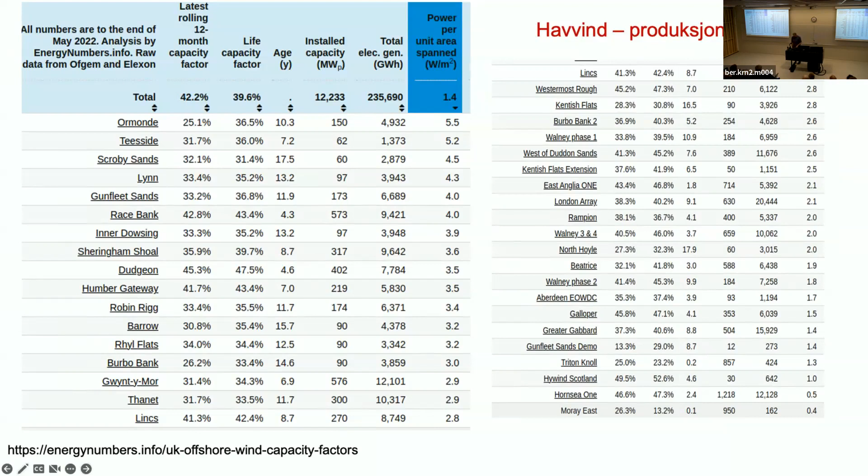4,0 watt per kvadratmeter. Hvis vi ser på solenergi, litt eldre bilde, men de fleste områdene i Europa ligger på 5 watt per kvadratmeter, og så kommer det opp i mer lukrative solenergiområder, da kan vi komme opp i rundt

10 watt. Hvis vi ser på her et eksempel, da, Benban Solar Park i Egypt, den ble åpnet i 2019, og leverer da enn så lenge 11 watt per kvadratmeter. Slik at man kunne fortsatt å snakket om dette, men de tallene står for seg selv.

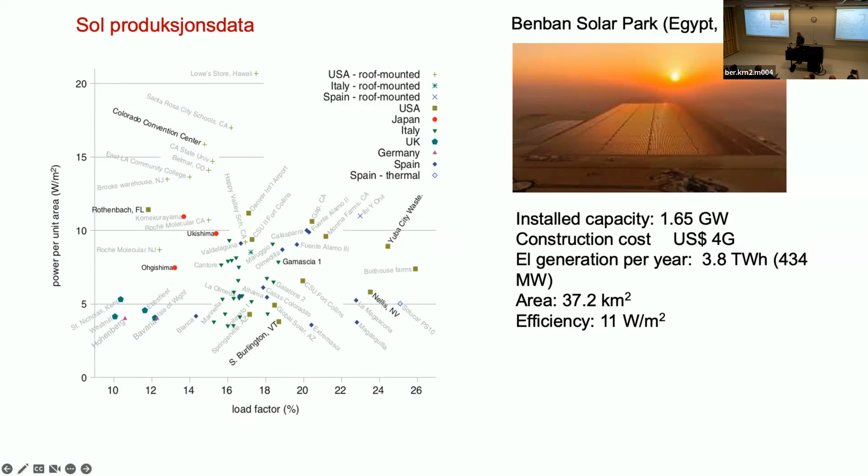Og skal vi da, hvor ender dette? Altså, hvis vi tenker oss et helt sånn hypotetisk globalt energisystem, så trenger vi faktisk ikke å tenke på energilager og dette med intermittency. Fordi i så fall hadde det alltid vært sol noen steder. Det har alltid vært vind noen steder, og egentlig hadde det vært stabil energiforsyning.

Men hvis vi nå tar lærdom av hva som har skjedd i Ukraina, så er det klart at hvis hvert land sørger for sin egen energisikkerhet og energiproduksjon, så slipper man å være avhengig av land som man spesielt nå ikke lenger vil være avhengig av.

Og det krever da energilager til typisk 100, kanskje mer dager, som vi må ha i tillegg når sol og vind ikke blåser.

Og så har vi også det at hvis vi skal lage hydrogen, ammoniakk eller andre flytende drivstoff, så trenger vi mer energi enn bare til primærbehovet. Så la oss nå si vi går ned til 2 watt per kvadratmeter som tar hensyn til lagerbehovet, og da trenger vi 2000 kvadratmeter hver og en av oss for å

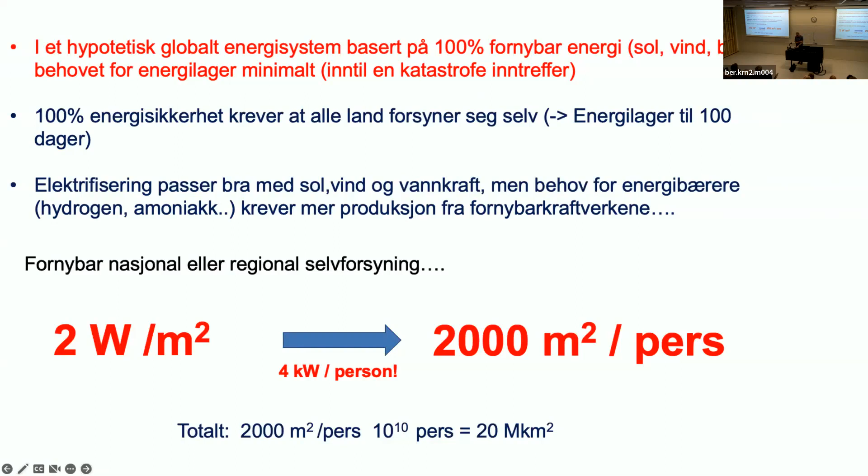forsyne nok energi. Og det gir da 20 millioner kvadratkilometer av jordens overflate som må brukes til energiproduksjon. Og er det noe problem? Vel, da får vi se på jordens overflate. Det drøye 100 millioner kvadratkilometer er beboelig, minus isbreer og litt andre ting, sånn at i forhold til 100 er kanskje ikke 20 så mye.

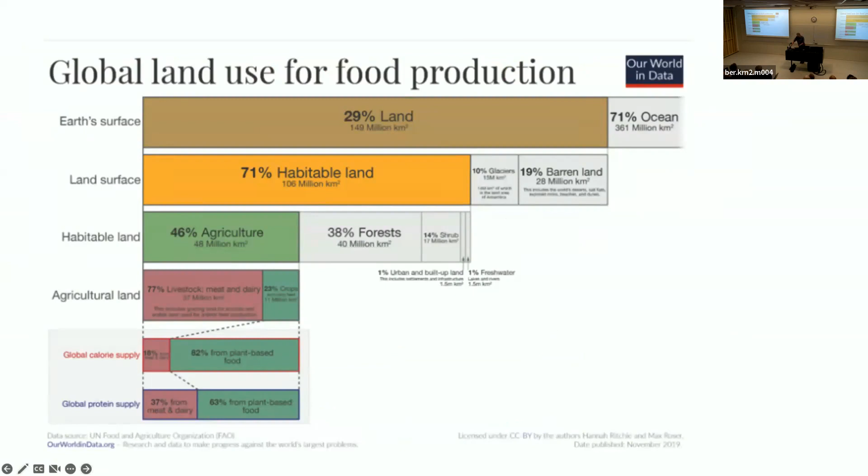Vår klimaminister har allerede fredet 30% av det. Der skal dyrene få gå i fred i skogen, og det skal være urørt. Dermed ble jordens overflate tilgjengelig for menneskelig aktivitet 30% mindre. Og på dette skal vi da legge inn 20 millioner kvadratkilometer til energiproduksjon. Da ser vi at det ikke blir så mye igjen til jordbruk, hvis energiproduksjon utelukkende fortrenger jordbruket. Det trenger det selvfølgelig ikke være, men vi ser at dette er en stor del av det som er tilgjengelig.

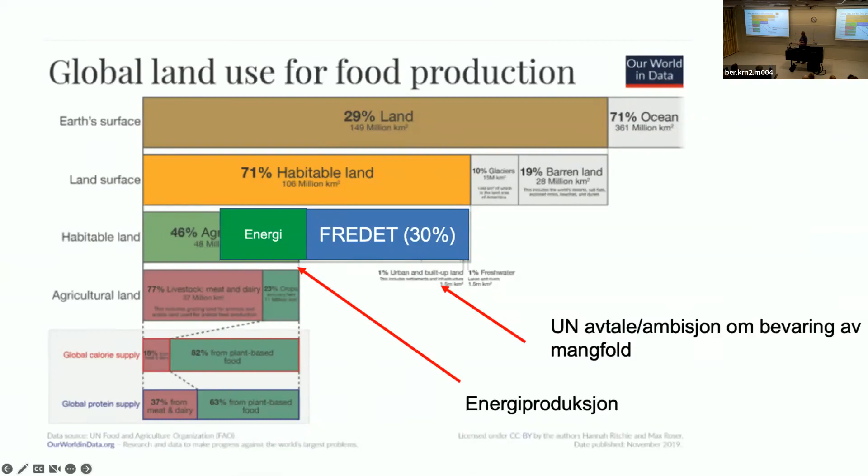Men det var hele jorden. Hvis vi nå ser på at kanskje skulle det være sånn at regioner og store land må være selvforsynt med energi, så hvis vi bruker folketettheten og deler den på 4 kilowatt, får vi prosent av landet eller regionen som må brukes til energiproduksjon.

Og vi ser at i Europa er folketettheten ca. drøyt 30 personer per kvadratkilometer, og det betyr at 13% av overflaten til Europa må brukes i dag. Selvfølgelig kan vi ta litt havflate også, men størrelsesorden der. Hvis vi tar vekk 30%, går det opp i 19%.

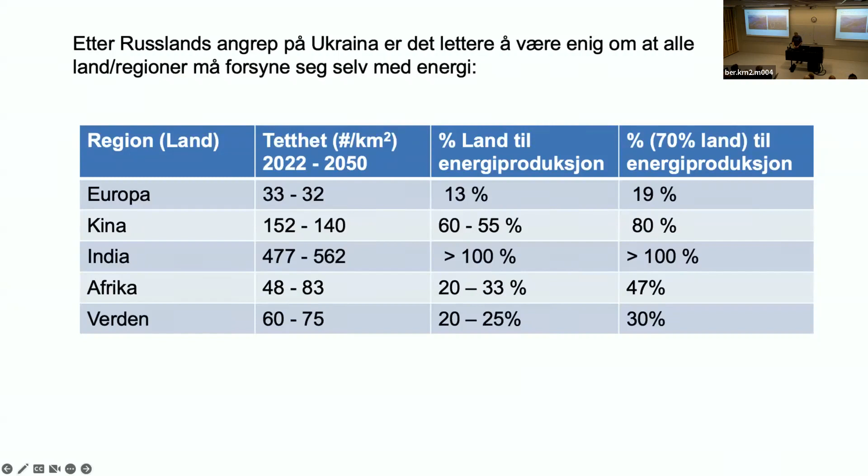Og fremdeles ser vi da at for eksempel i India skrives det rapporter og papir om hvordan 100% av India kan forsynes med fornybar energi med vind og sol og jippi, og så kommer man gjennom. Og det er på en måte et stort dilemma, tenker jeg.

Her er en Fraunhofer-rapport som hevder at det er mer enn nok land i Tyskland, fordi jordbruksarealet kan brukes dobbelt. Men det må jo være sånn at hvis du har solceller på jordbruksareal, vil solcellene absorbere mesteparten av sollyset. Og det vil i hvert fall redusere effekten på jordbruket kolossalt. Pluss at du må lage veldig små eller andre traktorer og sånne ting. Sånn at dette stemmer liksom ikke. Når jeg ser på sånne ting, reagerer jeg på det som fysiker.

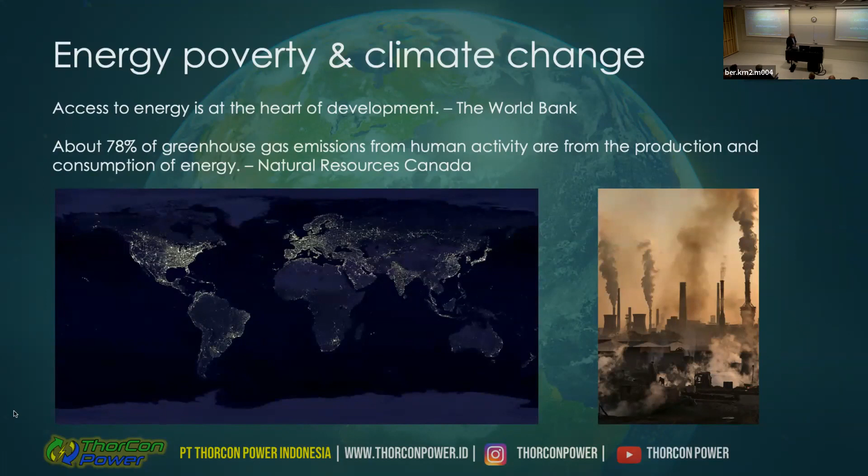I got a job with my client who ran large tankers in the Bahamas, and those tanker owners are the basis of ThorCon. We realized that we have an energy problem in the world. We have too many people living below poverty level, and all of them want to rise above and have a decent life. We were shipping oil, so we weren't helping - we were taking crude oil from the Middle East to the US, China, Japan, etc. But our founder, Jack Devanney, a professor from MIT, sat down and realized we need something else, and he quickly concluded that nuclear is the solution.

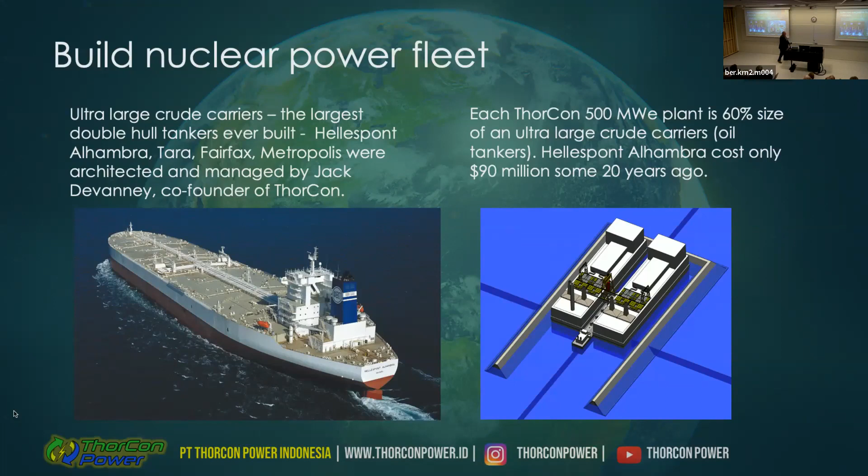Building in shipyards means we can do quick construction and have economy of scale. When you build in a shipyard, there are usually 4 or 5 ships being built at the same time at different stages, and you just follow the rolling lane, like when you build Boeing airplanes. It's the most economical way of building.

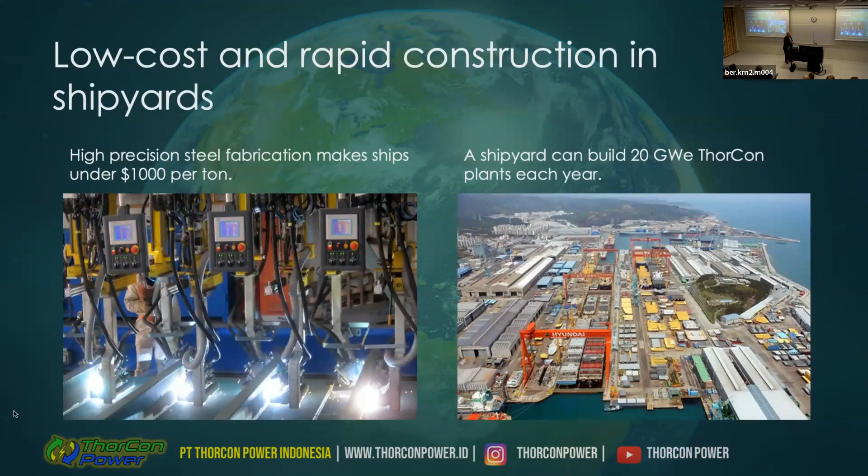A picture of the DSME shipyard in South Korea. Once our plant is built, we will tow it - either a wet tow, meaning it's floating, or on a heavy lift - down to site. And there's a picture of the island, Kelasa Island, which is the island site given to us by the Indonesian government.

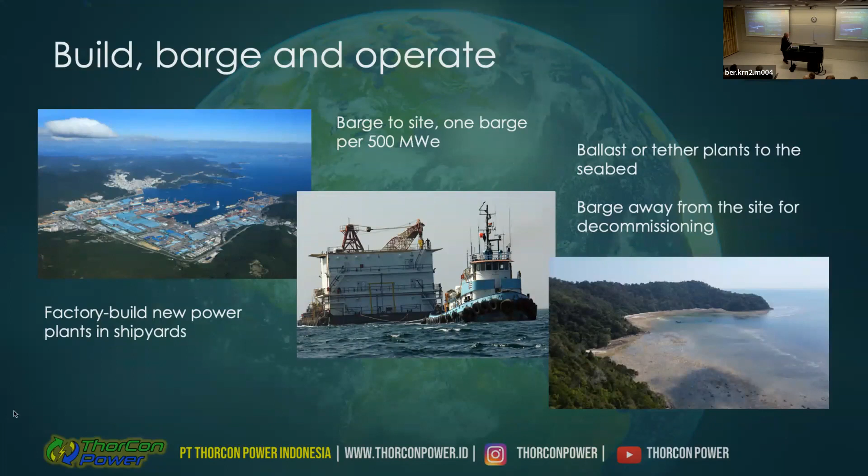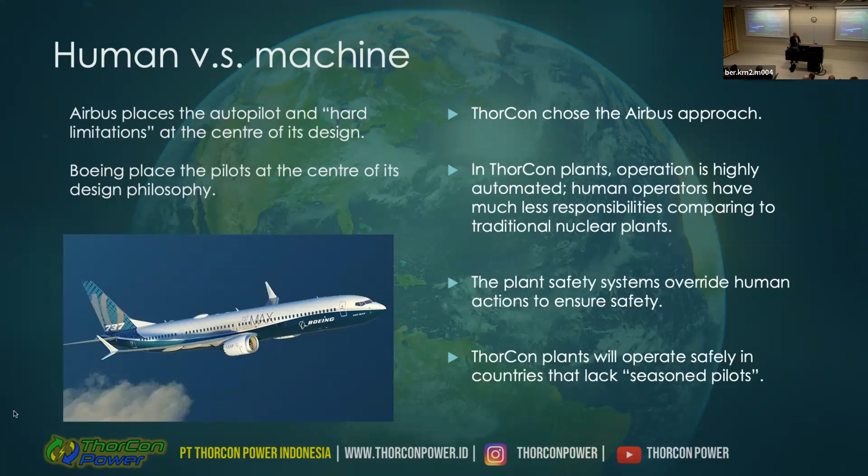A lot of people that we meet are very much afraid of nuclear. What happens if something goes wrong? The aircraft industry has two dominant players, Airbus and Boeing. Boeing has, for years, based their business model on human training and having humans controlling the airplanes, whereas Airbus has the total opposite approach, whereby the technology runs the plane. With ThorCon, we have adopted the Airbus approach. We do not let humans run our nuclear plants. They'll be run by the technology that we have developed. So what's our plan?

We are going to build a test plant, a non-fission test plant, somewhere in Indonesia, which we estimate will be finished sometime in 2024. Then we will test it, and based on those tests, we will start construction of our commercial reactor, which we expect to be on site in 2028, tested and started producing electricity in 2029. And then you can see how we are able to scale up in only a matter of years. We can have 18.5 gigawatts online with our technology.

When we started talking to people, they would say, oh, nuclear is too expensive, there's no way we can afford nuclear. So we quickly realized that we have to be cheaper than coal, otherwise we cannot get countries in the third world to listen to us. Our production cost, our cost for electricity, is 3.5 cents per kilowatt hour, all in: building, operating, decommissioning.

In this example, we're showing what the price of coal, the electricity from coal, is in Indonesia. It's 6.5 cents. So we found that the Indonesians could be willing to give us a power purchase agreement at the same price as coal, which means that one plant would generate 3 cents per kilowatt profit, which is $236 million per year per plant. So not only are we giving clean electricity to the third world, we're also offering very lucrative

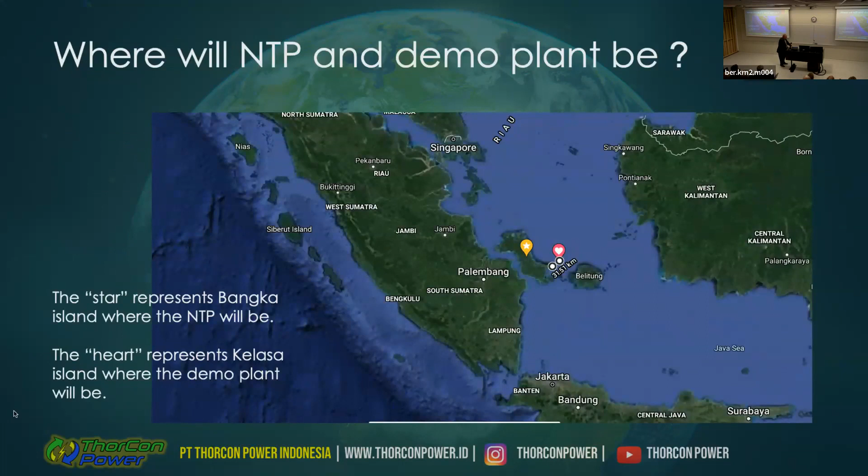We have been given a demonstration site, which is on an island called Kelasa Island. If you look, you probably recognize where you are if you see the picture. It's halfway between Jakarta and Singapore, and not very inhabited. There's a small island called Kelasa Island outside of Bangka Belitung, which you see on the right, and the big cove to the north on the island. That's the site that we have been given.

And that's our vision of how the site will look once it's fully operational, with some accommodation units. Not sure why we put in a tennis court, which is too hot to play tennis, but we did. That's the problem with designers—they put in something that you really don't need.

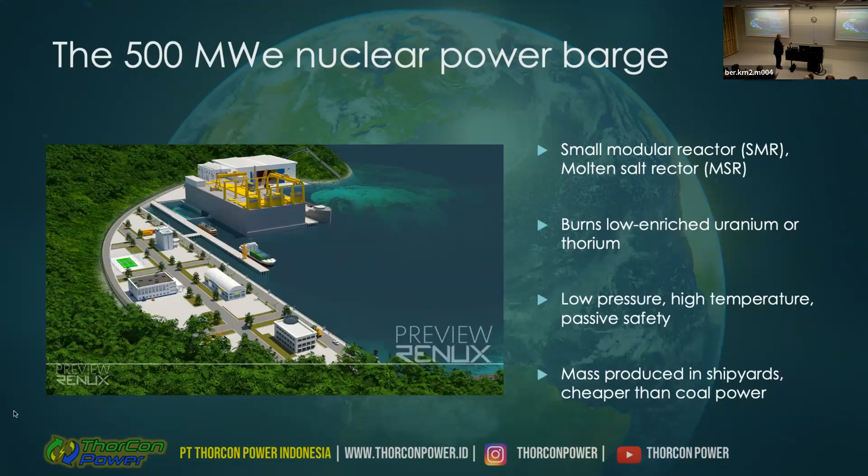So we've developed a small modular molten salt reactor technology where we can provide the world with low-cost, dispatchable power that's clean and safe, which is exactly what the previous speaker was looking for. We address all the problems that currently exist with nuclear energy, which is that it's over-regulated, it's always delayed, and it's overpriced. And Indonesia, they really have an ambition for a cleaner and more prosperous future.

And we've done research in the various parts of Indonesia, and found there's a high percentage of people that are pro-nuclear in Indonesia. They're realizing this is something that can give us the clean electricity we're looking for.

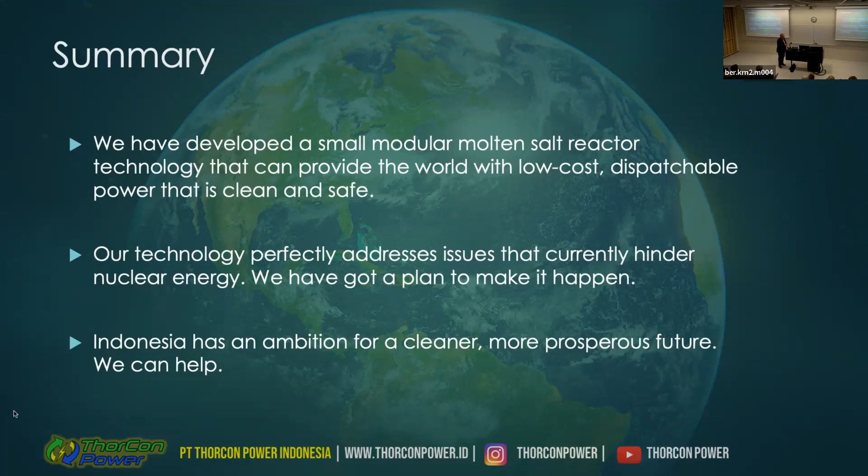Okay. My name is Lars Jorgensen. I'm the CEO of ThorCon US. We're doing the technical development for the reactor. A good place to start is to say, well, what are the priorities? If you have to do design trade-offs, what's more important than other things?

So one is inherent safety. We really want the safety to be independent of the operators. Boeing learned a hard lesson by expanding rapidly into the developing world and having pilots that were less skilled than in the US. And so we had the 737 MAX incident. So we are taking the position that we want safety to be independent of any operator action. That includes both that they don't have to do anything in the case of an accident and that they can't do anything to cause an accident.

We have a big advantage over the airline industry, though, in that the airline industry has no easy way to be fully passively safe. I mean, they're up in the air, they got to land. For our case, all we have to do is shut down and keep it cool and keep things contained. We can also do that depending primarily on gravity, not electricity or complicated machinery or software.

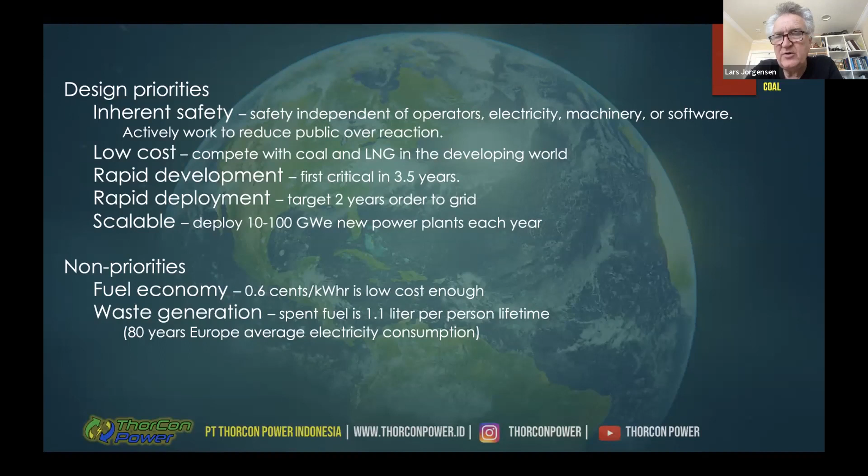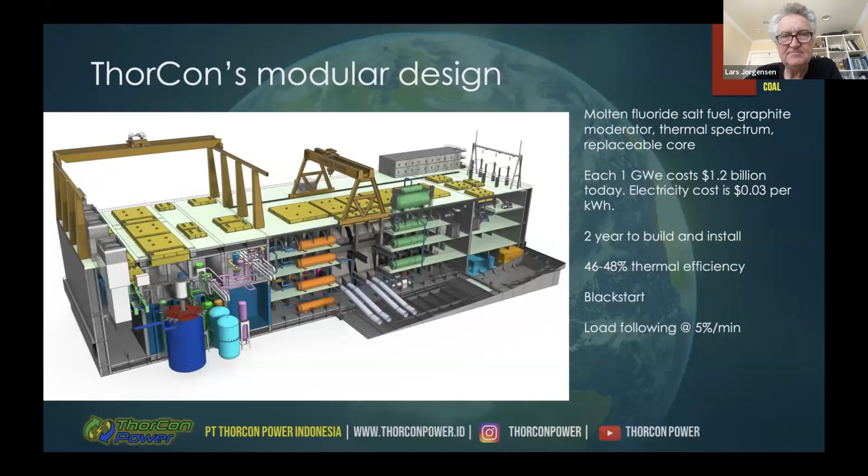Given the molten salt temperatures, we're able to get just under 50% thermal efficiency as compared to most nuclear plants, which are in the low 30% range. Just to give you an idea of size, we're talking roughly 160 meters long by 33 meters high and 65 meters in the other direction.

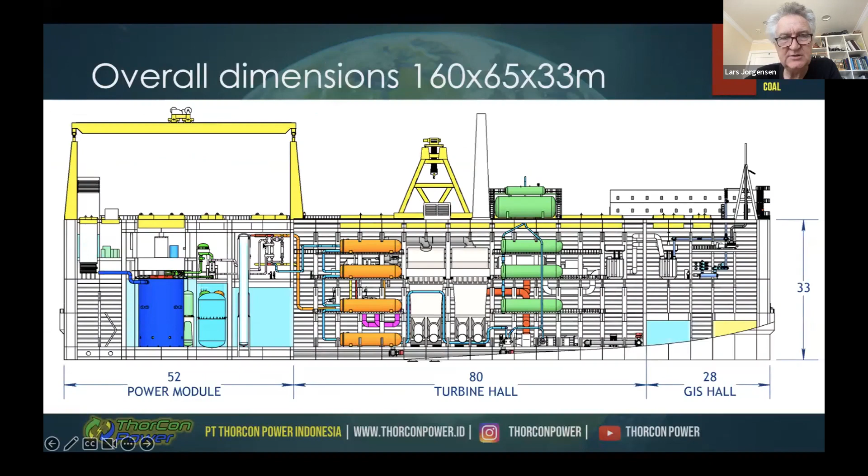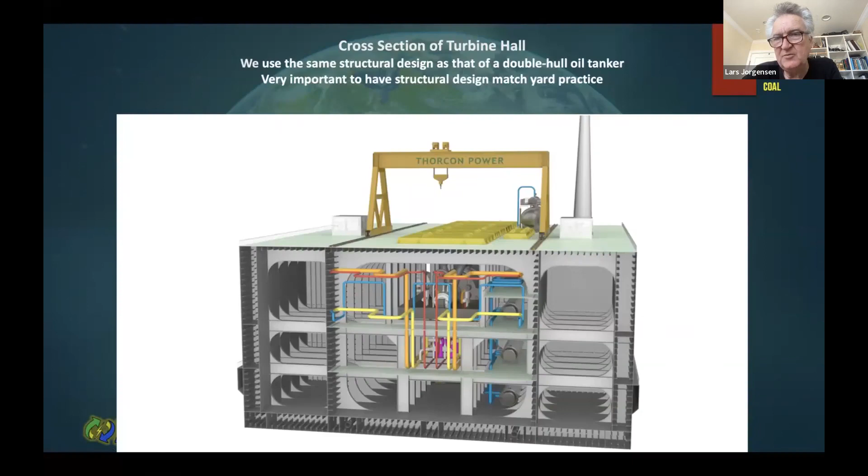It is built like a ship. For those of you with some shipbuilding experience, you'll notice the double hull here with all the ribs and the webbing. It is designed by Jack Devanney, who was a naval architect instructor at MIT and then for the Navy, and built the largest oil tankers. So we have started from, we got to build it in a way that the shipyard is really comfortable so that they can build it rapidly, and we'll fit our pieces inside.

Just to give you an idea of scale, this is a sketch of a typical coal plant. And to the same scale, here's a sketch of the heat producing portion of our power plant. Now, the turbine generator is going to be the same size for the two of them. But we argue that there's no reason we shouldn't be able to beat coal in cost. We're just a lot smaller.

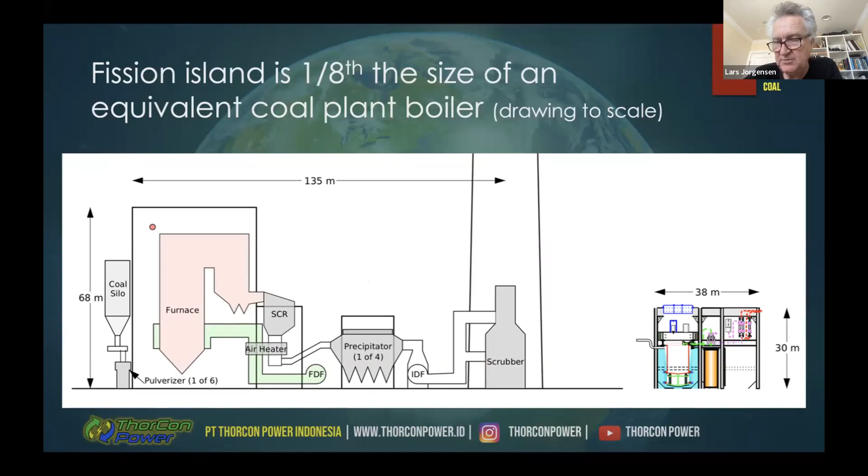Here's a lot of detail on the loops. So we have one loop which goes from 560 to 704. That's a molten fluoride salt loop. The salt boils at about 1400. So we have a large margin between what our high operating temperature is and before you go from a liquid to a gas. That means we really don't have any serious way of developing any significant pressure.

Get this to go away.

There, that's better. So we pump that around into a secondary salt, which is chemically compatible with the fuel salt in case there's a leak. Then we pump that around to a solar salt. This gets its name from thermal concentrating solar power plants. It's a nitrate salt. It is quite compatible with steam. And since getting a leak in a steam generator is pretty common, we needed to be sure that this third loop was compatible with moisture.

If you put moisture into these fluoride salt loops, you tend to get hydrofluoric acid as a gas, which is not nice. So we wanted that loop to keep them separate. The other thing this does is it keeps the high pressure from the steam generator isolated from the lower pressure systems here, where you're looking at like 7 bar. So very modest pressures. We can use standard stainless steel piping for these. We don't have to have exotic forgings.

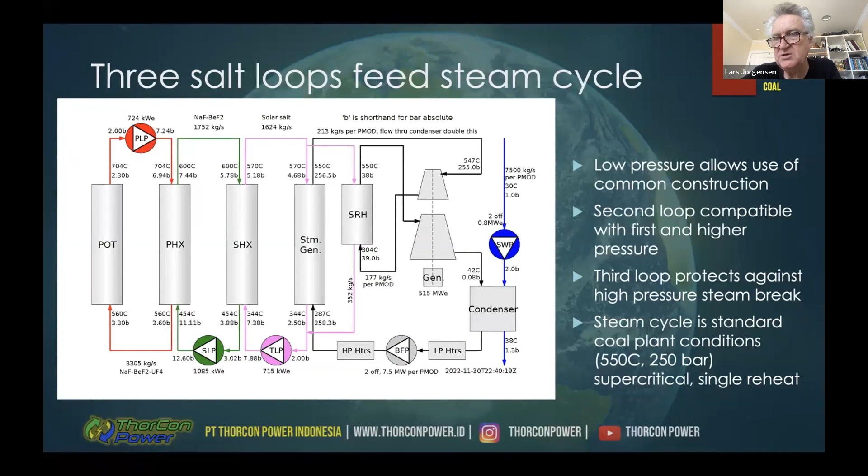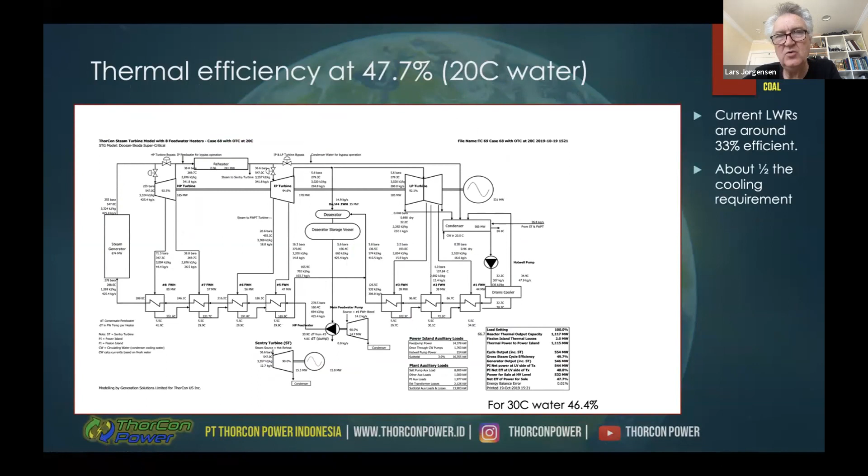And then the power plant itself, the turbine is a run-of-the-mill steam plant from a coal power plant. Similar conditions, it's supercritical single reheat. Here's a lot of detail on what the turbine generator side would look like. Overall, light water reactors are about 33% efficient. We're closer to just shy of 50. So we have about 1/2 the cooling requirement compared to a light water reactor.

That means we're doing all of the construction work at the shipyard, and we have a very firm schedule. Nuclear power plants tend to be very unsure of their schedule, anywhere from 10 to 20 years.

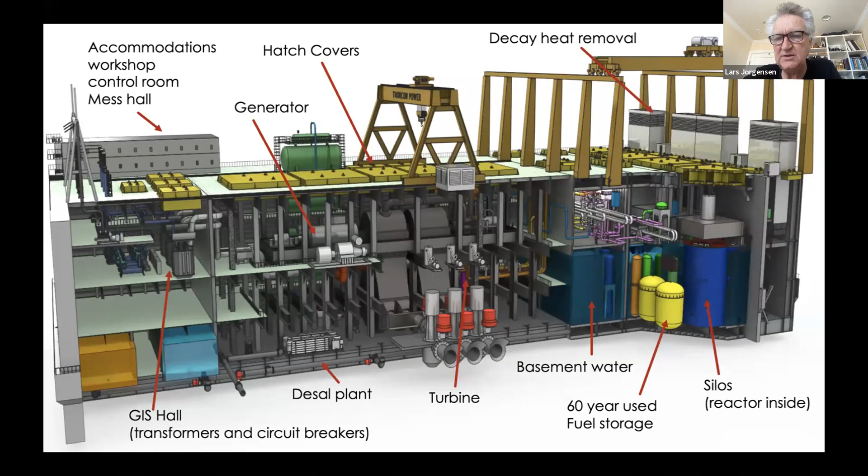We have experience building in the shipyards and normally get 1 year build times with very sharp penalties if they are late in delivering.

One thing we do have to watch out for is that we're operating at 600 to 700 degrees C. That's a long ways away from room temperature. So there's a lot of thermal expansion that goes on, and you really need to be careful with how you arrange things and how you support them to be able to tolerate the motion that comes with the thermal expansion.

A question we often get is, salt is really corrosive. And it's true that a mixture of salt and water is very corrosive, but pure salt is actually less corrosive than pure water at these temperatures. So the key is to make sure that the salt is pure. When we do that, the corrosion is less than 100 microns per year. So we can make the pipes just a little bit thicker and address the corrosion issue.

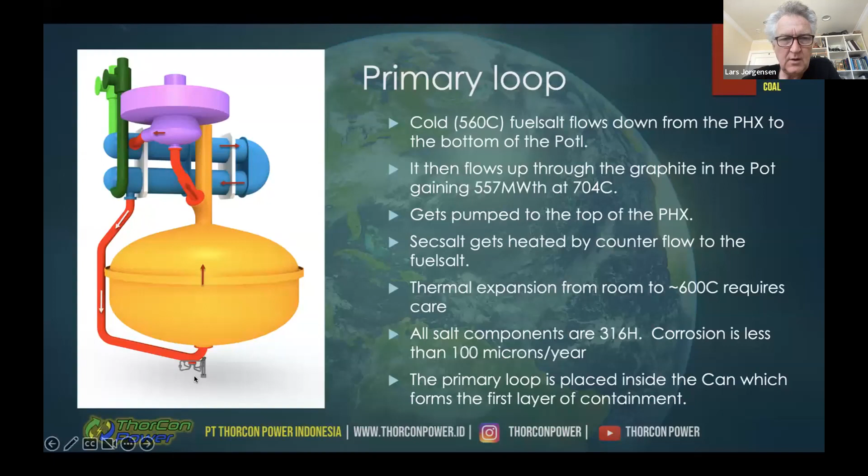So for safety, one of the things you have to do is to stop the fission process. That happens by physics by itself if the temperature rises. It's called a Doppler effect, but you can engineer the way that you've designed the core so that if things go over temperature, the fission is just going to stop all by itself. And that happens for us within about 20 or 30 degrees over our normal operating temperature. We do have that backed up by shutdown rods that can drop. They are held up by electromagnets, and if we sense that we're over temperature, you cut the power to the electromagnets and the shutdown rods will drop by gravity.

The second big thing you need to do is keep the radioactive particles contained. We have two gas tight barriers, and since we have such a big margin to boiling, we don't have any pressure wave to deal with on those gas tight barriers. So they're not challenged even in an accident.

The last thing you need to do is to remove decay heat. That's actually the most challenging aspect of nuclear. After you stop fission, you still have about 6% power due to decay heat. In our case, that's 30 megawatts. You have to remove that or you get in trouble. And that was the problem both at Three Mile Island and at Fukushima.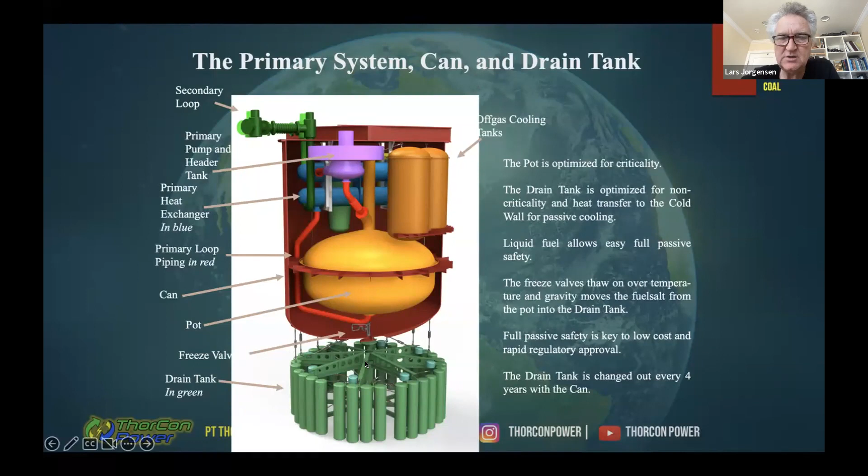And furthermore, it has a large surface area to volume ratio, so it has good cooling. So it can take the heat of the salt draining and take the full load of the decay heat. That heat gets transported by radiation to the cold wall, which is basically a wall of water. So we transfer heat by radiation to the water, and then that water will flow up by natural circulation.

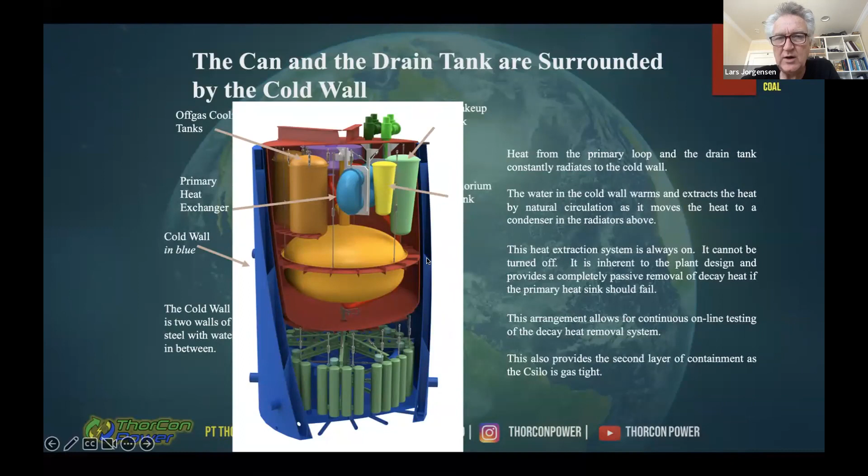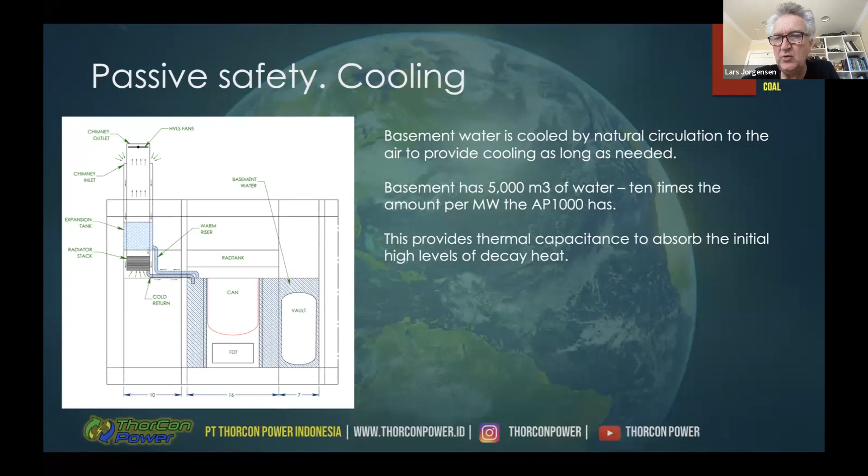So it flows from the drain tank into this water. It goes up into an expansion tank and then to radiators. And the radiators have a chimney, so we get natural circulation of air to cool the radiators. So in the event of, say, a full station blackout where you lose all power, it drains, it goes to the drain tank, and then it cools in these radiators, and that lasts indefinitely, until people can come around. It will keep cooling it indefinitely. So here's a picture of the expansion tank, the radiators, and the chimneys above it.

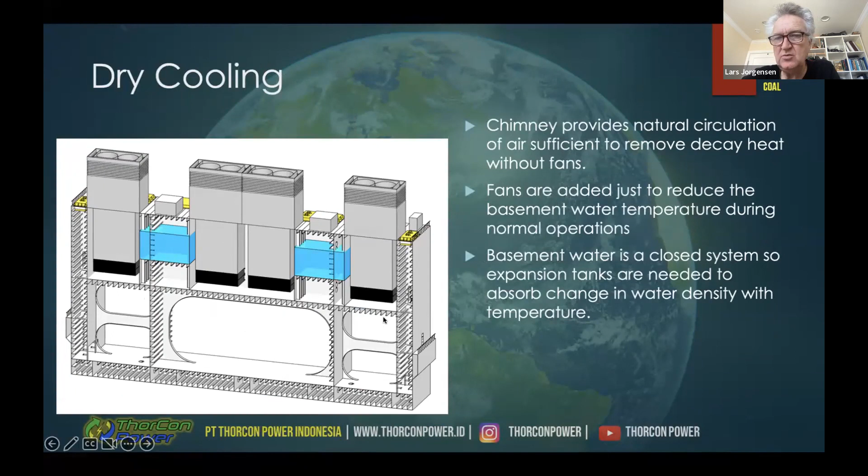Basement water is a closed system, so there's no radiation that's coming from that. We also have about 5,000 cubic meters of water in the basement, which means if somehow you manage to block all four of these chimneys, say with multiple aircraft that hit it or a massive volcanic ash flow, then you'll start boiling off the basement water, and that's good enough to last for about 60 days. It is at low pressure, so you can refill it with an ordinary garden hose.

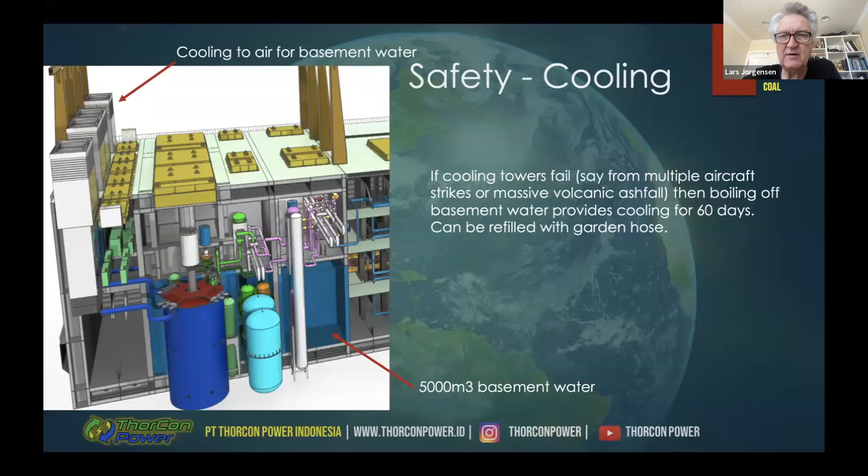At Fukushima, one of the challenges they had was that their cooling water was at very high pressure, and even when they got water on site in fire trucks, the fire truck pump wasn't strong enough to be able to push water in to cool it.

We're going to build a non-fission test platform as our first stage that will have a full-size can with everything inside of it as we plan to build it, and then a downsized secondary loop, and we'll just cool it to air. And the intent is to test as much as we possibly can before we get into having radioactive fission going on, before we're into a licensing regime

and under the microscope. We expect that there are groups around in the world that very much hate nuclear and try to find anything to make the public think that something awful almost happened. So we want to debug as much as we can before we get into that kind of close scrutiny by those organizations.

So we will be able to use electric heat to simulate the decay heat and show that we can remove the decay heat. We can use pressure to test the containment barriers, and we can time how long it takes to drop. We can run the pumps at full speed and check for vibrations. We can run it at temperature to check for thermal expansions.

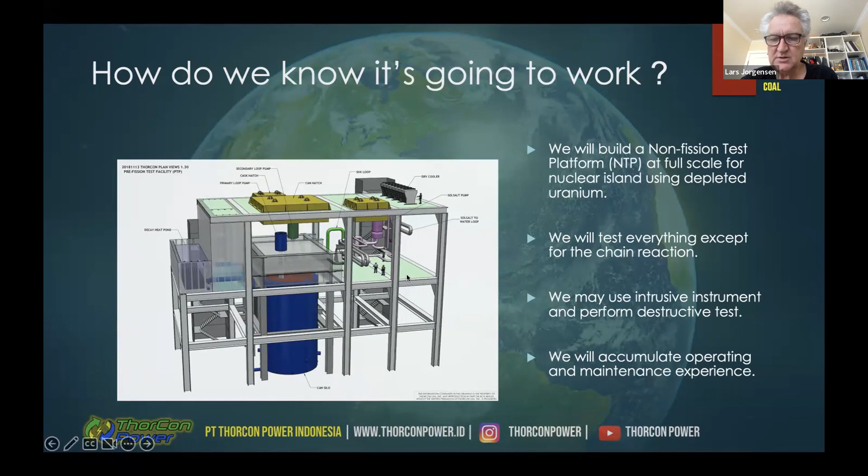So we'll just get a lot of that engineering practice, first of a kind bugs taken care of in the non-fission test platform. That also means that we have less private money tied up. We haven't purchased the turbines and all the electrical gear, so the investment during this time is lower, which makes for better returns. Talked through most of that already.

Once we're done with the non-fission test platform, we'll build a demonstration or experimental plant. That will be a full-size power plant, but we'll start out just by repeating the kind of tests we did at the non-fission test platform. Then we will go to subcritical, so no power, but be able to measure some neutronics responses. And then we'll go to basically zero power, and then step-by-step increase power slowly.

So we will, say, operate at 10 megawatts, but we have a cooling system that can handle 500 megawatts. And that way we can safely confirm the expected behavior as we build up power and get step-by-step licensing from the regulator.

One of the challenges with a molten salt reactor is it's a different kind, and almost all the regulations written in the world are written for light water reactors. So we have to work together with the regulator to both show them that our plant is safe, but also to train them and to train ourselves in how to safely regulate a molten salt reactor.

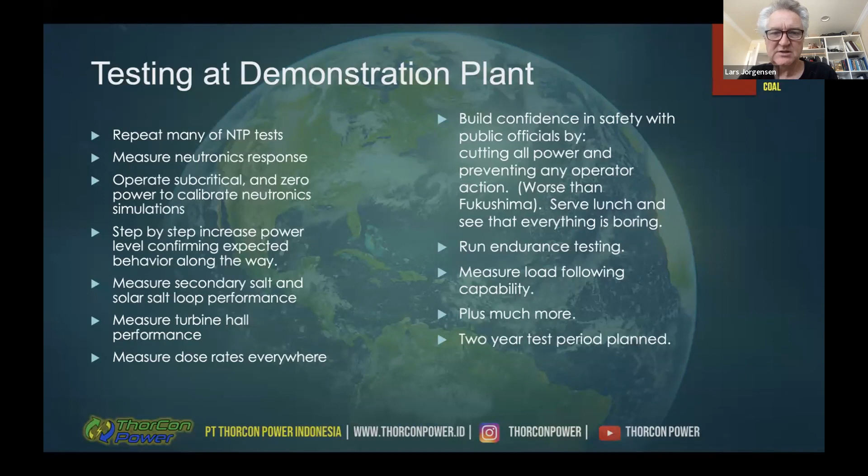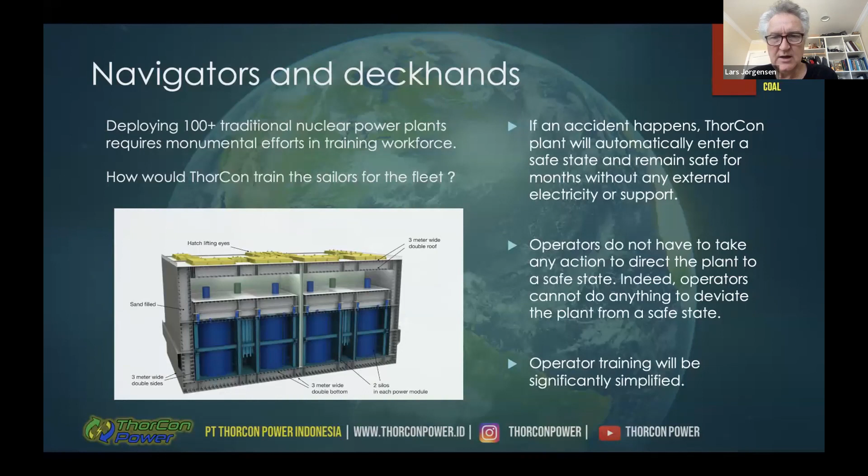One of the challenges is getting enough staff. In the US, we staff nuclear power plants with Navy nuclear engineers, people who've been trained in the Navy and are very disciplined. But if we're going to go to a worldwide fleet, we're not going to have that kind of pool to draw people from. And our reputation will hang on the worst run plant, not the best run plant. So that's why it's very important to us that the plant will automatically go to a safe state and remain in a safe state without any operator actions. That makes it much easier to train the operators.